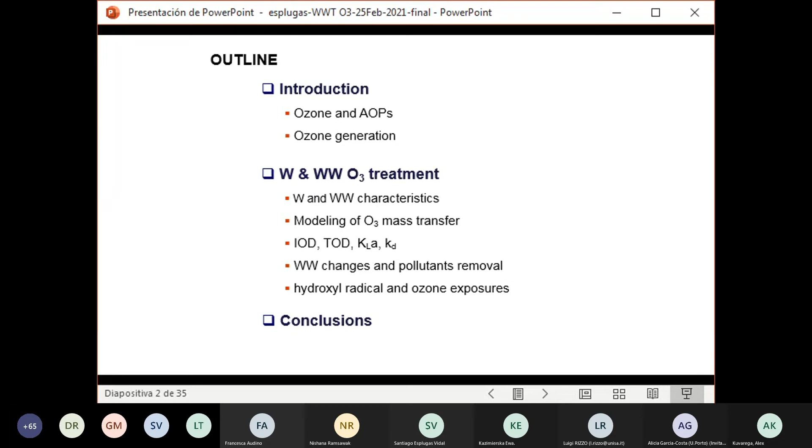Well, let's talk on ozone. Ozone, this is the chemistry. This is a nice molecule with 3 atoms of oxygen. And here is more or less the history of ozone. Really, ozone comes from the Greek "ozein", to smell. This is because if you are in a storm night and there are some sparks in the sky, you will smell something, and this is the typical smell of ozone formed by the sparks and the oxygen

present in the atmosphere. And as you can see, ozone was discovered near 200 years ago, and only in 1863 was it known that the molecule was the same as oxygen and is formed by three atoms of oxygen. Two important characteristics of ozone. One, I will focus more in the next slide on this: on one part we have the tropospheric ozone.

When you go to the media, you will see people talk about the good ozone and the bad ozone. The good ozone is the stratospheric, it is in the stratosphere, and acts as an ultraviolet filter of the radiation, and prevents UV radiation from arriving at the surface of the Earth, mainly in the southern hemisphere. That is the good ozone, the stratospheric.

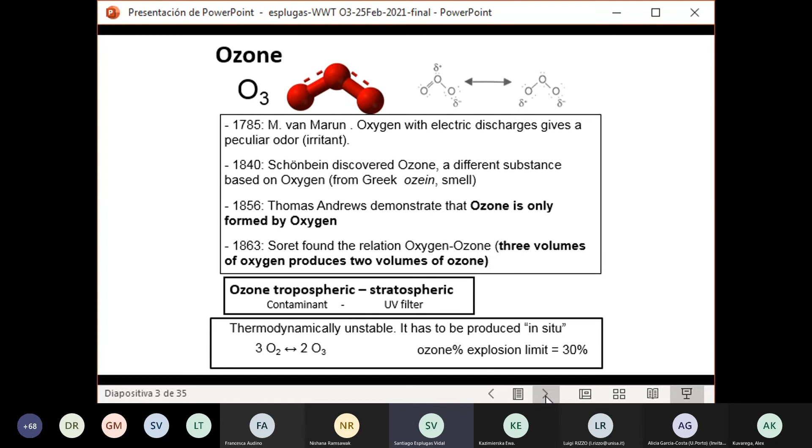That means it's not a problem. More of some ozone properties I indicate here. It's a blue gas, irritant, heavier than air. That means that it remains near the surface. It is very reactive and unstable. That's good, very reactive and unstable, because it reacts fast with the chemical compounds.

As I said before, it needs to be generated in situ. It's more soluble in water than oxygen. That is good in order to have the effect of an oxidant. It's a strong oxidant and used as a disinfectant. An advantage: because it is formed by atoms of oxygen, it does not introduce new ions in the medium, the water medium.

There is also one disadvantage: from a technological point of view, normally mass transfer controls the process. That means transferring the ozone from the gas phase to the liquid phase, where it reacts with the pollutants in the water, is mainly the control of the global process. And as I said before, it's an air and toxic pollutant.

And here you see some nice pictures I found on the internet about the difference between tropospheric ozone, stratospheric ozone, etc. And this is also important because of the toxicity of ozone to humans. That means it's not an easy gas to manage. If you work in the lab, you need very good ventilation, under an exhaust fan. If not, you get a cold very easily, or if you have problems of asthma, these kinds of problems will be increased.

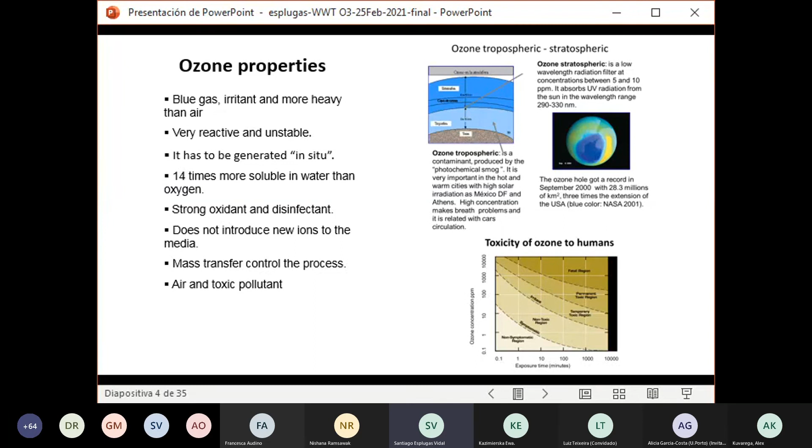Well, this slide shows the relation between ozone and the AOPs. Sometimes people indicate that ozone is an AOP, and sometimes others indicate no, ozone is different from AOPs. I suppose at the end of this webinar, you will know the reality. Ozone is an AOP and has special characteristics that are very valuable. In this slide, I indicate, well, not all, I suppose there are more AOPs, but you will see the first ones indicated involve ozone as AOPs.

Remember that AOPs were defined in 1987 by Glaze regarding the hydroxyl radical advantages in water to remove contamination under mild conditions, always focused on the hydroxyl radical. Later on, through investigation, other processes entered the AOPs, like Fenton, photo-Fenton, electrochemical processes, titanium dioxide photocatalysis, and people learned it's not only the hydroxyl radical; other radicals, hydroperoxyl, and also radicals that make the same function, like persulfate or peroxymonosulfate, entered this field.

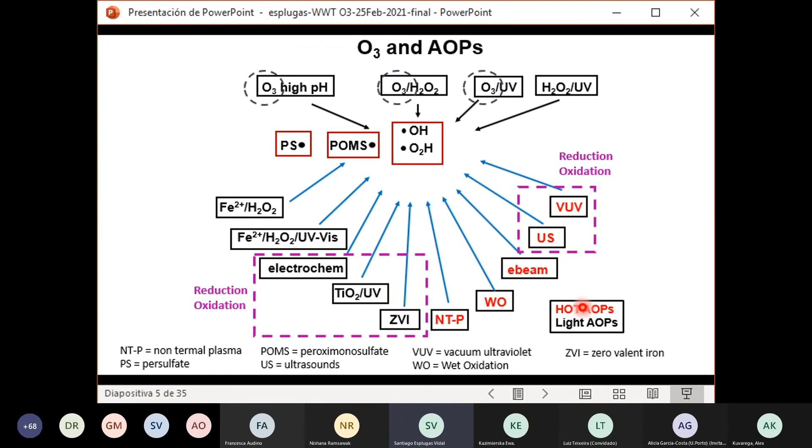That means that nowadays maybe we need to talk about hot AOPs, AOPs that are really not mild conditions, as opposed to room temperature, atmospheric pressure to produce hydroxyl radicals or similar radicals, like the AOPs initially used and defined.

Well, let's go to some chemical properties of ozone, and the most important is the reactivity. You will see in this graph we have the ozone. The ozone may react in two ways. One way: it oxidizes the compounds, and this is the direct attack of the ozone on the organic or inorganic molecule. This attack is on high electron density sites and is selective. Not all the compounds have the same mechanism.

And the second is through the production of hydroxyl radicals. The hydroxyl radical is very well known and oxidizes the compound. The hydroxyl radical is much more unselective, and really few compounds resist the action of the hydroxyl radical. That means the hydroxyl radical does not discriminate between one molecule or another.

And there are some general considerations taken into account: initiators of these hydroxyl radicals, hydroxyl ions, hydrogen peroxide, UV radiation; some promoters, ozone, hydrogen peroxide, organic matter; and another important thing, inhibitors. There are some scavengers, and one scavenger is hydrogen peroxide. We will talk later about this because there is an important AOP process, peroxone, ozone with hydrogen peroxide, that is mainly used in plants and has some controversy.

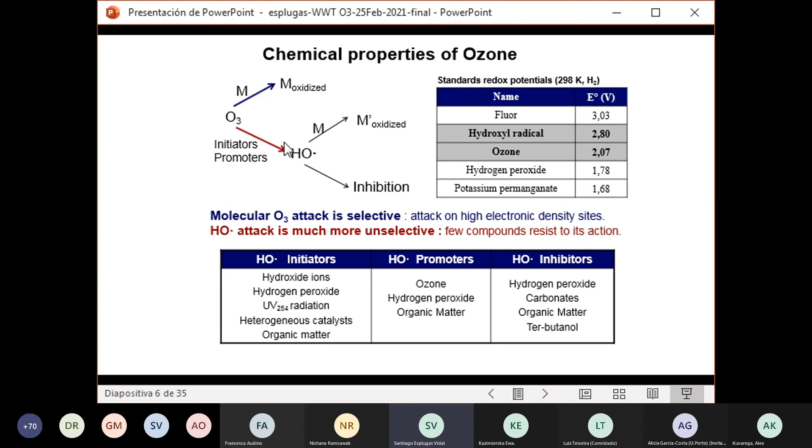Well, in the previous slide, maybe I went too fast. One important advantage of ozone is that it's possible to modulate its effect one way or the other, doing the oxidation selectively or unselectively. One possibility is to try to make it unselective, that means destroy all the pollutants independent of their type. In this case, there are some interesting ozone-based AOPs that move towards high production of hydroxyl radicals.

Some of them you may consider at lab scale. If you want to move to a pilot plant or demonstration scale, it is problematic, mainly because of what I have written in red. That means changing the pH for large volumes or large flows is not easy. It's complicated. The same happens with the use of UVC.

For this reaction you need UVC, because the wavelength for the reaction is below 310 nanometers, and it's complicated. You also need quartz material that is fragile, lamps that are not reusable, etc.

Ozone with hydrogen peroxide, which is maybe the most used after direct ozone treatment, has this problem: the cost of storing and manipulating hydrogen peroxide. It's not very easy to manipulate hydrogen peroxide at high levels.

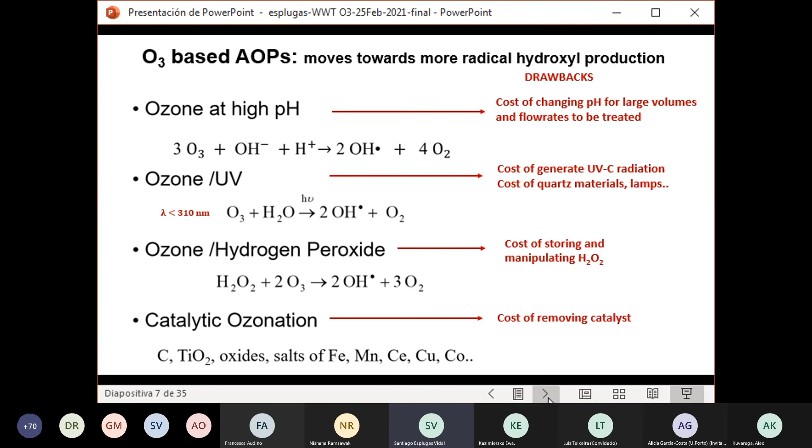And finally, catalytic ozonation. It has a small or moderate problem in removing the catalyst. You put in a catalyst, normally a solid material, with the water matrix, and later on you need to remove it. That means it doesn't look very convenient.

Well, hydrogen peroxide with ozone is the peroxone. This is the chemical reaction of the peroxone. This is not the reality because it's the stoichiometric reaction. You need to add one hydrogen peroxide molecule to two molecules of ozone, and this reaction gives two hydroxyl radicals. The ratio of hydrogen peroxide to ozone is important. You see here it's 1 to 2, but really the best results were more or less 1 to 1.

Why? Because hydrogen peroxide is also a scavenger of the hydroxyl radicals that you produce. That means that in some cases, instead of continuously dosing ozone to a batch reactor with wastewater, micropollutants, and hydrogen peroxide inside, it's much better to dose both at the same time. Dose ozone, dose hydrogen peroxide, and the results in continuous mode are good.

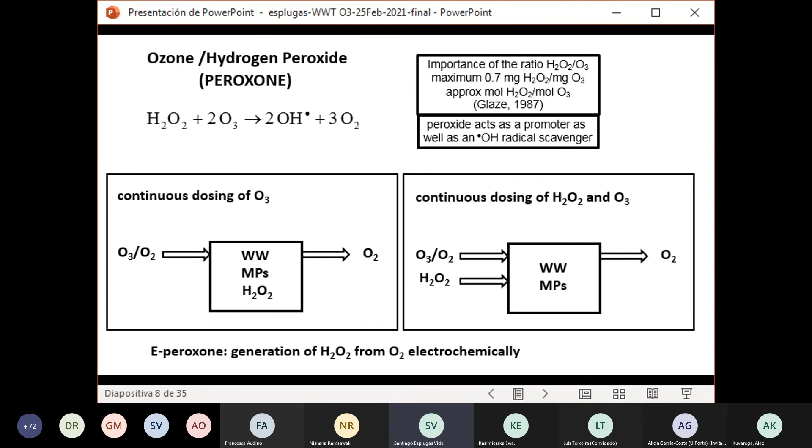And one important advancement in this area is the electroperoxone. Having hydrogen peroxide in storage needs important investments because it's not that easy to store as a liquid. It may explode. So how is it possible to generate it electrochemically? There are some nice papers lately that work on this. And this all goes in the direction I said before: transfer all the oxidation power into hydroxyl radicals that are not discriminative with the compounds to be removed.

Well, another important point is ozone generation. I said previously that I would talk just one slide about this. For on-site generation it's not problematic, because the technology is very easy. You only need an electric discharge, and in this discharge you produce some radiation and also ozone. It's not very complicated. Unless you want to use UV radiation, but that gives a very low ozone concentration, and normally it's only in labs, not in pilot plants or demonstration scales.

Here are some advantages of ozone: not necessary to transport, not necessary to store, the air is no cost, easy to produce, the technology is very simple. But there are some drawbacks. You need to remove the humidity, and the excess ozone has to be removed, because if not, you contaminate the atmosphere. And maybe the big drawback is that only 5% of the electric energy goes to the chemical bonds. That means the electric yield is very low. But there are some people, mainly in Japan, working on a better electric-to-chemical yield.

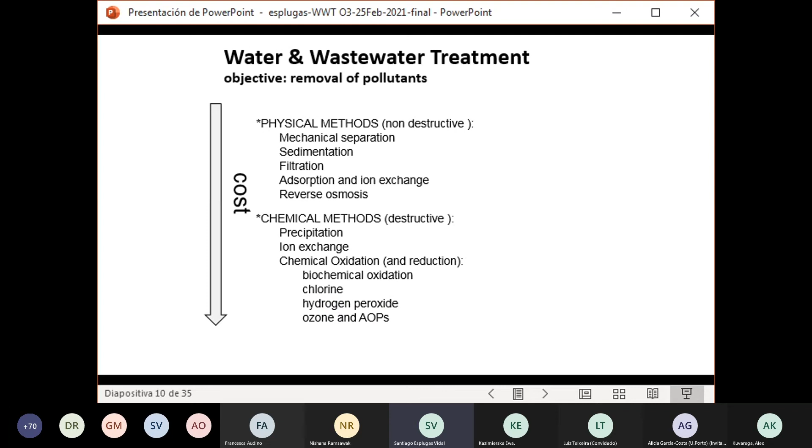Well, let's move to wastewater treatment, in general, not necessarily by ozone. If you want to treat water and wastewater, normally the objective is removing pollutants. There is a logic that depends on cost: first try physical methods that are not destructive, such as mechanical, sedimentation, filtration, adsorption, reverse osmosis, and later on try destructive methods that are more expensive. Chemical oxidation and reduction are expensive. Biochemical oxidation is cheaper. That's why you use them at the end of the treatment chain.

Well, with reference to water treatment, ozone is widely implemented nowadays in tap water treatment plants. It's more complex, but this is the simplest way of using ozone.

You have the raw water. You want drinking water. That means you have here the solid removal, coagulation, sedimentation, later generation to put ozone, later activated carbon. This part corresponds to organic matter removal, and finally some filtration, and sometimes at the end some chlorination, and you have advanced purified water.

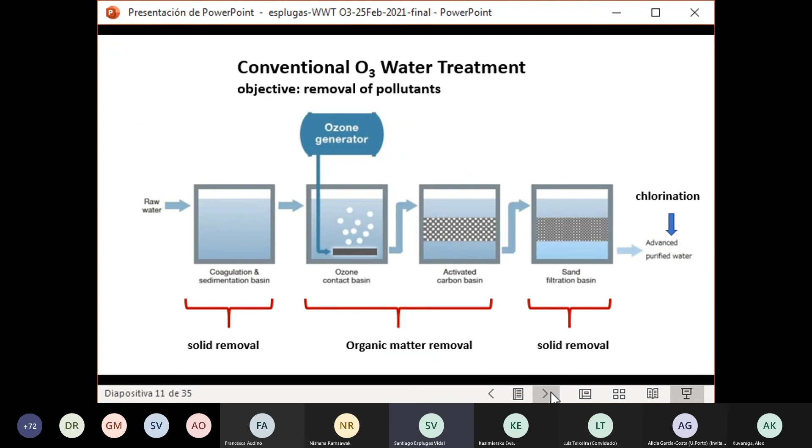This is very simple, but in reality they are more complex than this; it's a very simple one that I found on the internet. In the case of wastewater treatment, it's the same. The objective is the same. The objective is the removal of pollutants. And normally the way is similar to the previous one. You have primary treatment to remove solids normally.

Secondary, normally biological treatment. Here I put the typical activated sludge. Activated sludge nowadays is changed by membrane bioreactors or moving bed bioreactors that are all different. And finally, a tertiary treatment that is optional, sometimes chlorination.

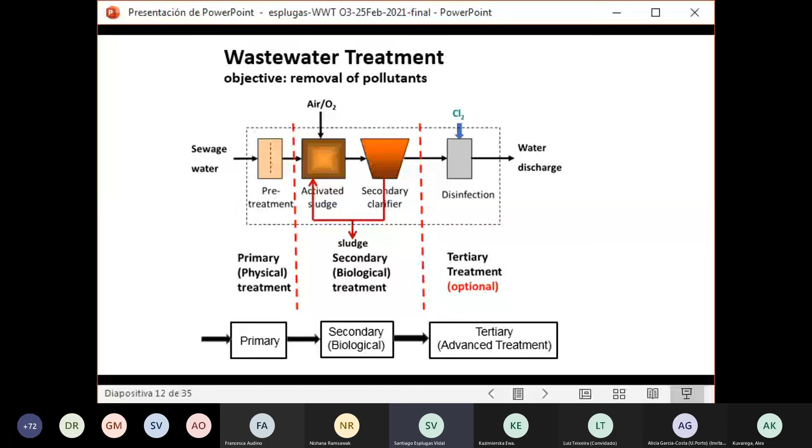This is easy, and what's important is the removal is the same, and the difference is the matrix. The water matrix is more complex in the sewage than the raw water you use in order to have drinking water or tap water in a water plant.

In order to remove the pollutants, oxidation, AOPs are not the only technology. There are other technologies that may help this part. That means adsorption processes, membrane processes that are used also in water plants, in wastewater plants, and also biological reactors. And here in this slide, I indicate more or less some drawbacks that the AOPs and also biological reactors have. That means you need to evaluate hazardous products that may be formed during these chemical or biochemical reactions.

And another drawback, but it corresponds to the adsorption process and membrane process, is that really they don't solve completely the problem. You have some contamination in the liquid, and this is a transfer of the contamination from the liquid to a solid or to a concentrate. And the same, you need to treat the concentrate of water. It means it does not solve specifically the problem of the removal of pollutants in water or in wastewater.

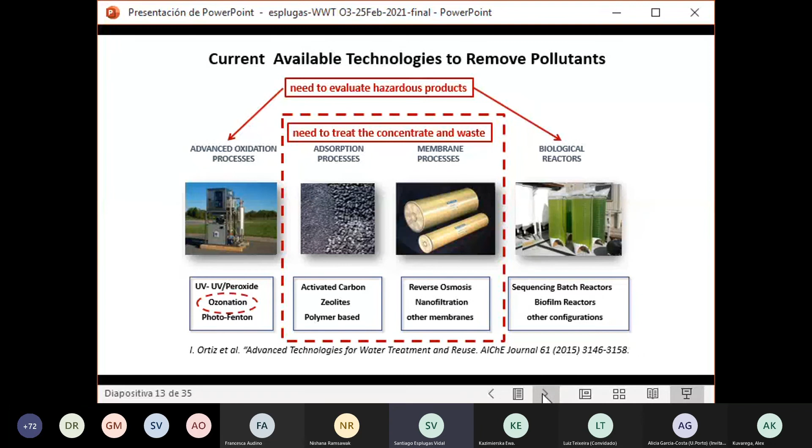Well, parameters that you need to follow if you are working or researching in water and wastewater treatment by ozonation or with activated carbon or similar. It's independent. There are many. I indicate some of them that are interesting to follow that affect the chemical oxidation, such as total organic carbon, dissolved organic carbon, alkalinity. This affects a lot the ozonation.

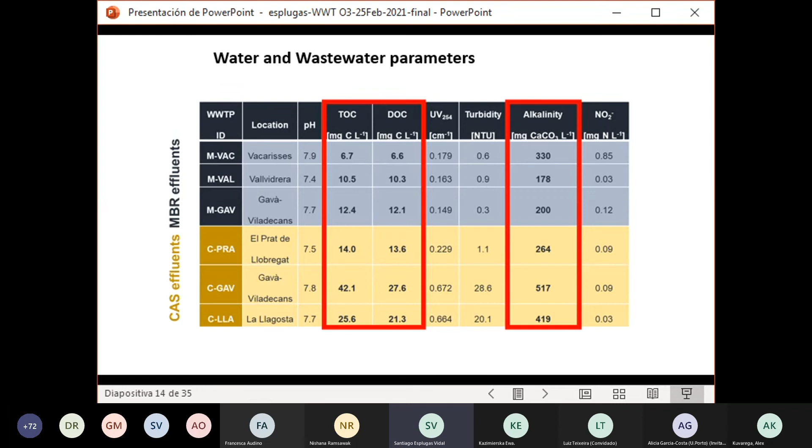Also the turbidity affects, also the nitrite content, and also the UV 254 nanometers, the absorbance measured at 254 nanometers. That corresponds to the aromaticity, how many aromatic compounds I may have in the water matrix. And here, yes, I put different wastewater treatment plants because the problematic of the pollutants in wastewater is more complex than in water. Normally, when they want to produce drinking water, they use water that has enough quality to be treated. In wastewater, the quality is so bad.

Here is a bigger list of the parameters to follow, to control, in order to have an idea of what happens during treatment of water or wastewater. I say chemical oxygen demand; I haven't included it in the previous slide. I haven't included suspended solids. I include only turbidity. I haven't included the ammonia content. It's nice to see because ammonia may be oxidized by ozone and other oxidants. And also molecular analysis.

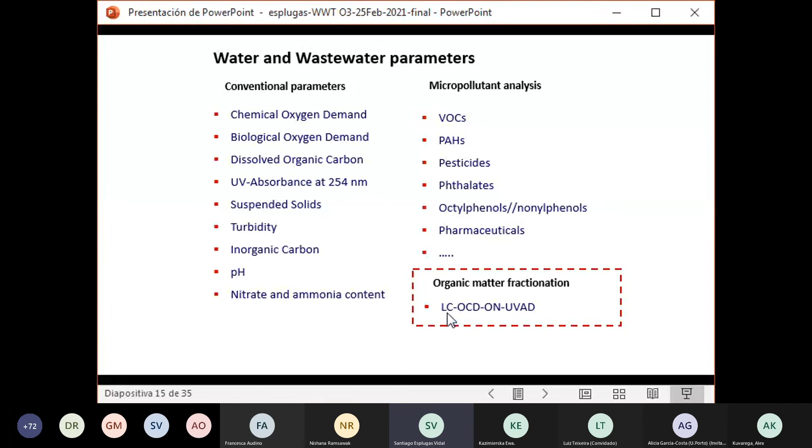Molecular analysis is very complex, and sometimes people make some groups and talk about VOCs, PAHs, pesticides, phthalates, phenols, pharmaceuticals, etc. And here there is an important parameter that is not very much used, that is organic matter fractionation. In this case, it's liquid chromatography with organic carbon detection. This is not very new. I think it started 10 or 15 years ago.

And this is important because there are many people working in this field and relating this with the problems that people have in membrane separations with fouling. And if you make an oxidation treatment of the water, you oxidize the organic matter that is in the matrix, and maybe you change the conditions, and maybe you have problems in the membrane separation you have at the end of the wastewater treatment train.

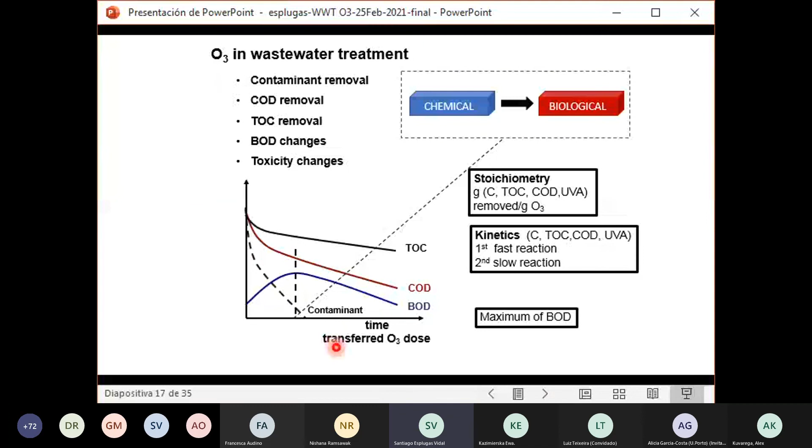Another important point is toxicity. I haven't indicated it in this figure because toxicity is complicated. Sometimes it increases, sometimes it decreases. Managing toxicity, it's very complicated to explain its behavior. And the kinetics, the removal of carbon, TOC, the compound, COD, UVA: normally at first it's a fast reaction, then a second period of slow reaction, according to time or transferred ozone dose, as I will say later.

Well, let's talk about some modeling. I know people don't like equations much in a presentation, just to indicate that it's very important to know the mass transfer of ozone in your system. Ozone mass transfer depends on physical properties, concentration at the interface, turbulence, the gas hold-up, and this is a two-film model. I suppose some of you are from chemical engineering and know the two-film models.

That means the ozone gas needs to move to the interface, then needs to move to the bulk of the liquid, of the water, and reacts there. This is a kinetic step that follows an equation like this. Normally, because of the low concentration of ozone in the gas phase, the control is in the liquid, the diffusion in the small layer, and this is a typical problem of absorption with chemical reaction. There is a lot of information in the scientific literature and general books on this, and a number appears that many people know. It's just to know that if you have problems in ozone mass transfer, you need to move in this field.

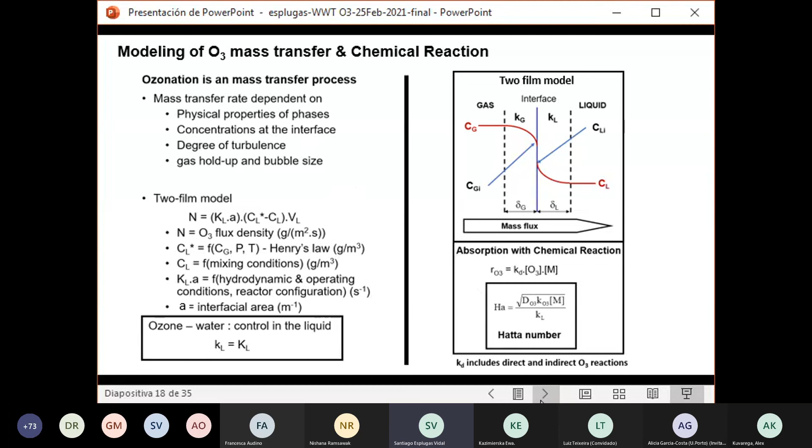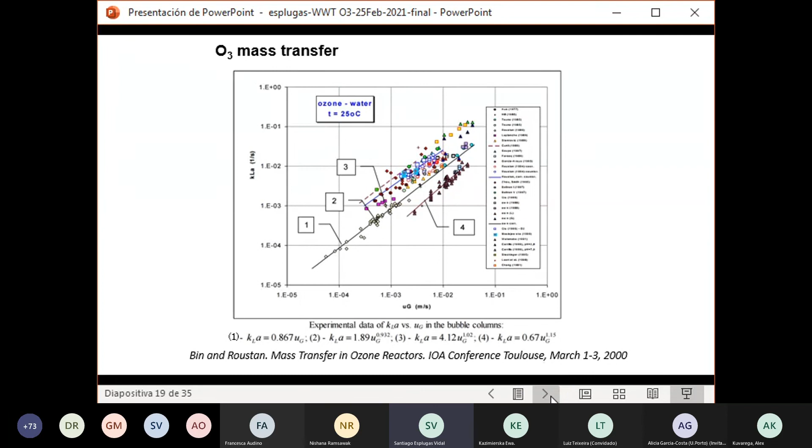There is information about some of these parameters. For example, in ozone mass transfer a lot of information is available, mainly using pure water, not wastewater, and values of KLa, the mass transfer coefficient on the liquid side. I recommend this paper, but if you search the internet or the scientific literature, you will find many good correlations. That means you may simulate this behavior.

And the same happens with the reaction of the ozone. I indicated previously that ozone may react by itself or may react producing hydroxyl radicals. So the chemical reaction of contaminant removal is two reactions in parallel: one is the ozone direct attack, the second is hydroxyl attack. In the scientific literature you will find a lot of information about kinetic constants for these reactions. And it's interesting to note that in recent publications, maybe some of you know about this, there is the quantitative structure-activity relationship.

There are some estimations. I think QSAR was first used in pharmacy to know if a molecule may be reactive to treat a disease or not. And there is a protocol for estimation or prediction of parameters. It's possible to predict, because not all compounds have been studied and have information in the scientific literature. You may move to this paper, it's in press, accepted, and you will know more about this methodology that works fine for compounds not yet studied.

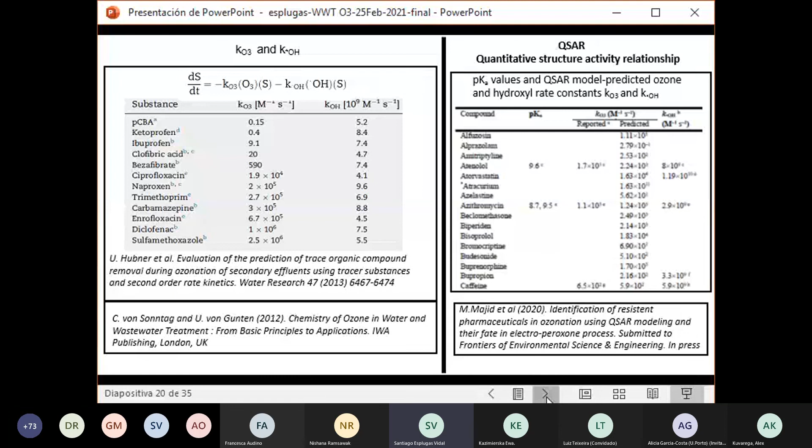Well, if you work at pilot plant, or with wastewater, a complex matrix, you need to take care about the immediate ozone demand and the transferred ozone dose. Instead of time, people prefer to use the transferred ozone dose. The IOD is the minimum ozone dose, milligrams per liter, to be transferred to have dissolved ozone in water in a continuous flow.

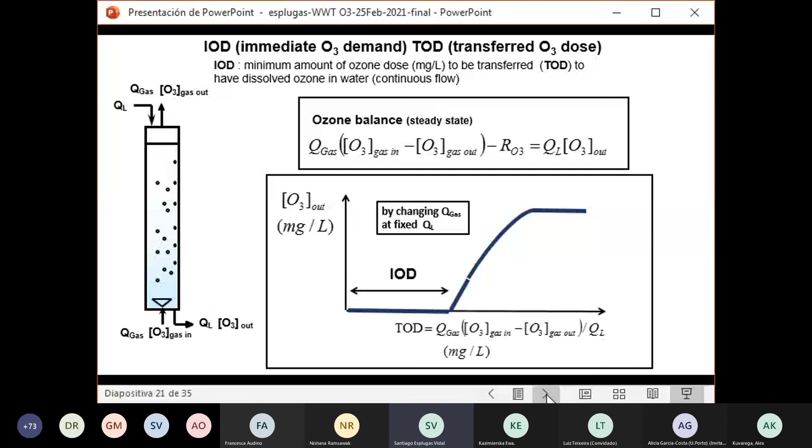You have a continuous flow. You simply maintain the liquid flow rate constant, you modify the gas flow rate, and at the point when you detect ozone in the aqueous phase, this is the immediate ozone demand. Logically, with pure water this value will be near zero, but in wastewater it may be 2, 3, 4, 5, 10, up to 20 milligrams per liter. That's the zone where ozone is consumed by the highly reactive compounds in the media. It's important to take this into account if you work with very complex water matrices.

Also, I will move quite fast in this. This is semi-continuous ozonation. It's possible to evaluate, to estimate this IOD, the mass transfer constant of ozone, the constant of removal of ozone, with this simple mathematical modeling. You may find this in this paper, and this is more or less the shape of the curve we present in this modeling.

Here is the IOD and the start of the ozone to be detected in the liquid phase. And this is the ozone gas inlet to the system, and this is the ozone gas outlet of the system. You inject the ozone this way and it leaves this way. And here you have the water. Ozone concentration in the water is 0 at the start, and it takes some milligrams of ozone in order to appear in the water. This is another interesting parameter to use when working with wastewater effluents.

Here are experimental results in my lab of estimation of IOD, these parameters in municipal wastewater effluents from different effluents. It's interesting, one of the effluents was the sludge. The sludge is 75% water by weight, and you will see the IOD is quite large. And if you look at primary effluent, that is effluent that is going to enter a secondary treatment, that means biological treatment to remove organic matter, it has an important value.

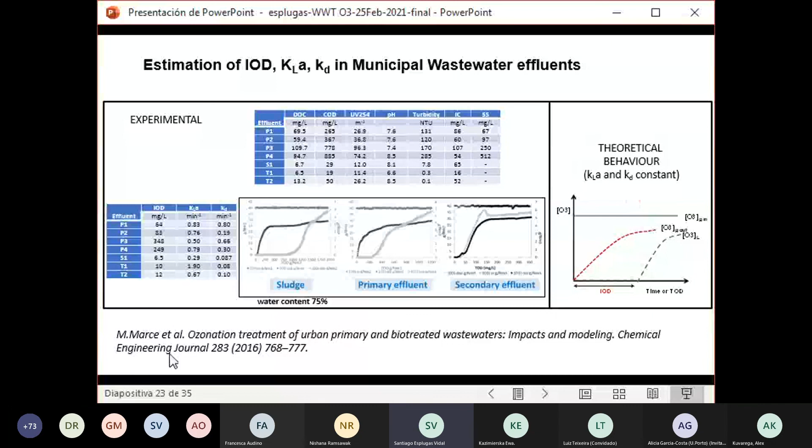And if you are in a secondary effluent that leaves the secondary biological treatment or membrane bioreactor, you will see that this value is really very low. And you will see that it is more or less not the same behavior that this model predicts, but it's not bad. More information you may find in this journal.

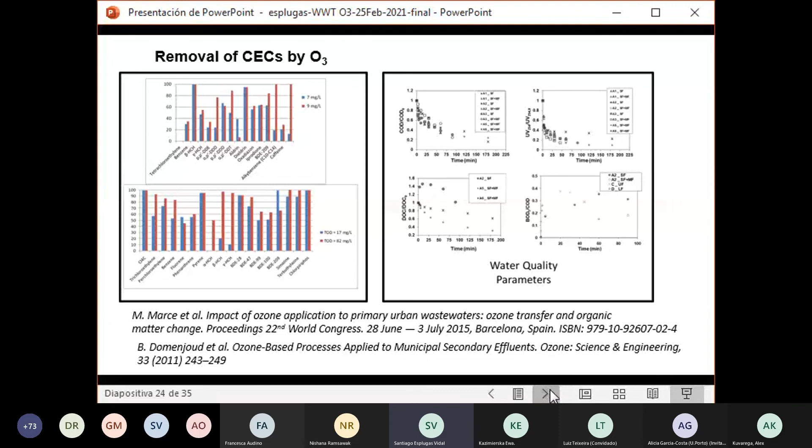The removal of contaminants of emerging concern by ozone depends on the dose. You will see in this slide, you increase the dose, you increase the removal. And it is also important to know that the water quality parameters of COD, UV, DOC, and BOD change. Sometimes it's important to take this into account. That means if you work in wastewater media, it's very important to follow this because these are parameters easy to follow. And the same happened with the LC-OCD.

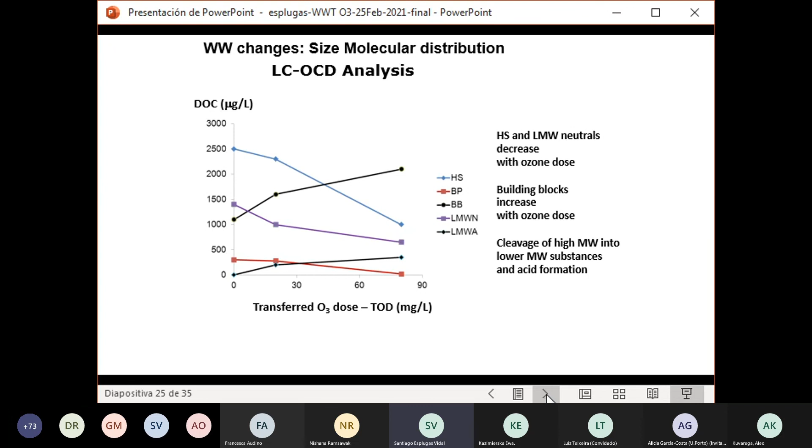Another important point is the importance of the total transferred ozone dose in ozonation. You will see 10 milligrams per liter, 9 milligrams per liter is enough to remove all the compounds, but you have to take into account that it depends on the values of the chemical kinetics of ozonation and the chemical kinetics of hydroxyl radical attack.

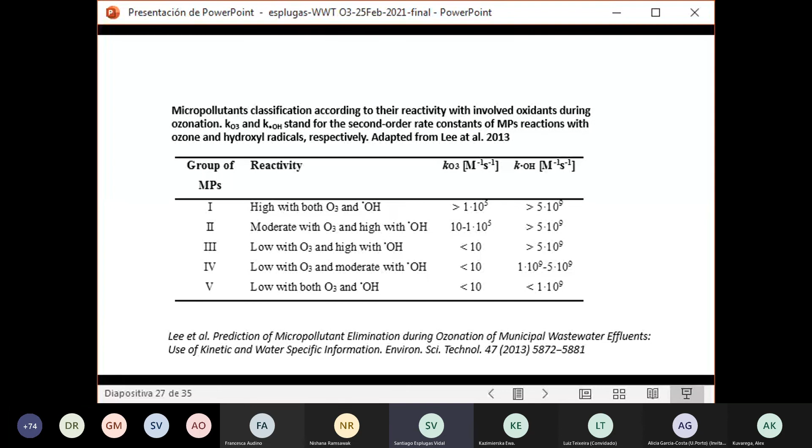According to this, this is a table adapted from this paper. It's not the same. It's something I changed just to classify the pollutants according to the kinetic constant of ozonation and the kinetic constants of hydroxyl radical attack, and it's possible to classify them in 5 different groups that may give different behavior when you treat these compounds with ozone.

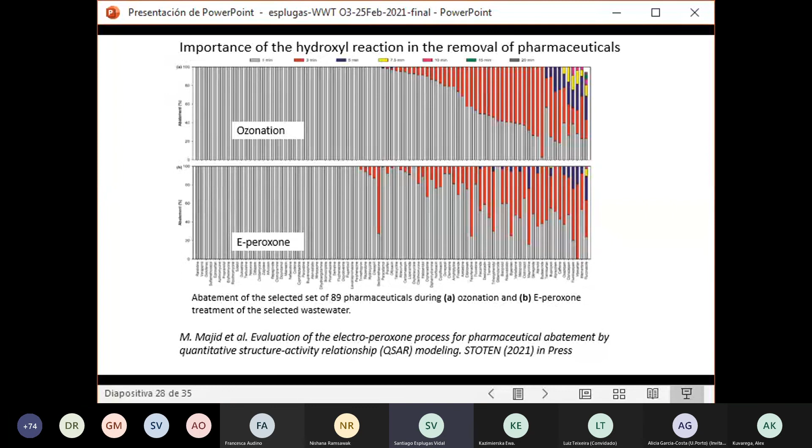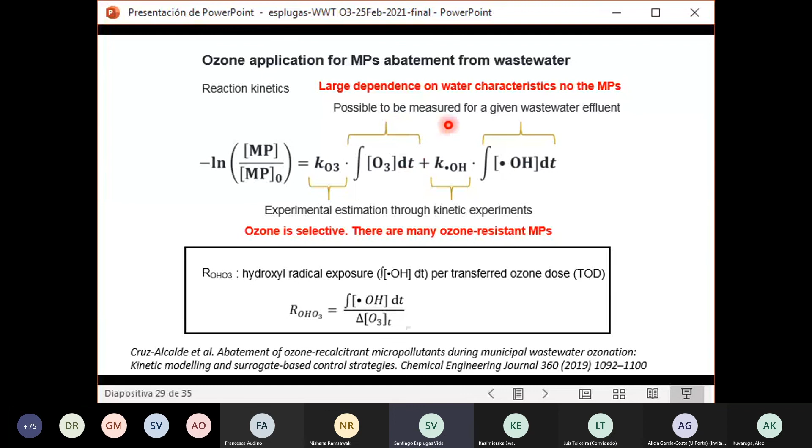That means you may use the ozone rate constants and the hydroxyl radical rate constants found in the literature, and you may find these values by doing some experimentation at lab scale. And this is the case. I use acetamiprid, that is a micropollutant refractory to direct ozone treatment, in different wastewater matrices, all corresponding to different effluents. And also we see this hydroxyl radical exposure.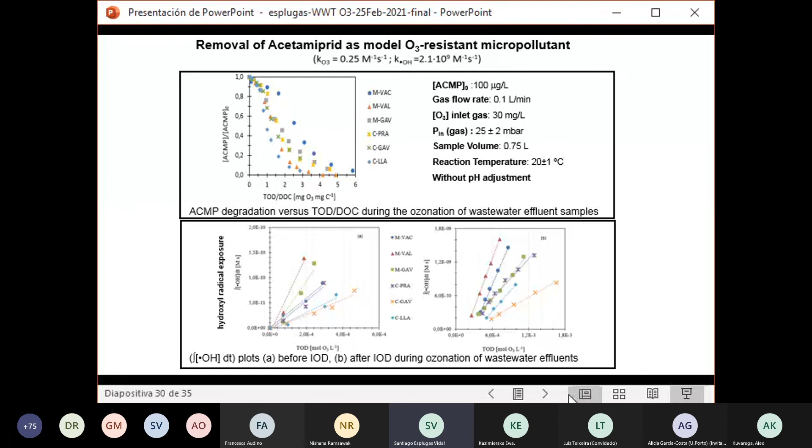And in this case, there are two different zones: one before the IOD and one after the IOD is completed. That means the behavior is different. It's logical because before the IOD the reaction is quite fast, and after the IOD the reactions are slower. And with these values, is it possible to simulate what happened with other compounds like ibuprofen?

2 minutes, Prof. Santi, I'll give you 2 minutes to finalize. Our time is running out. Okay, 2 minutes, I will finish.

This is ibuprofen, you will see that it's good.

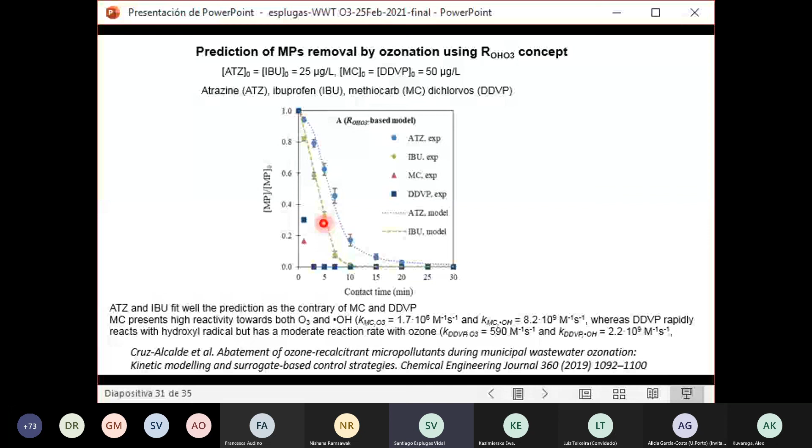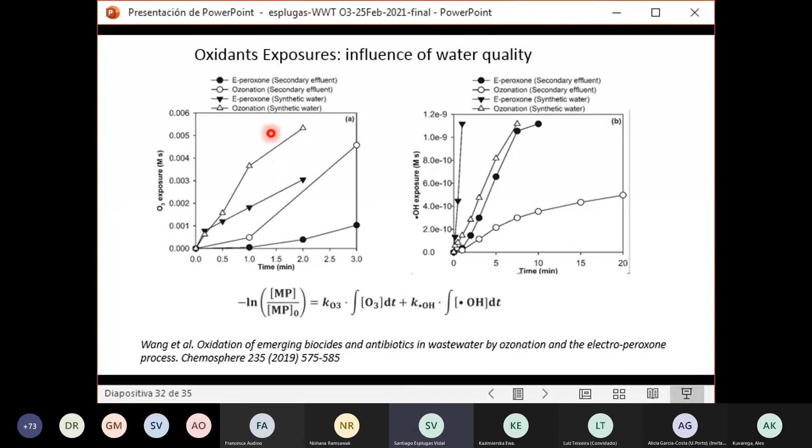The simulation. Here, the same situation of exposure influence of the water quality. In this case, it is water and wastewater effluent. Normally, when one is working with wastewater effluent, exposure is smaller than if you work in water. And I got finally to conclusions. I will be too fast.

Ozonation is able to reduce all these important parameters, such as COD, DOC, UVA, turbidity. It increases biodegradability, so it's a very good effluent. It's important to see the change in the molecular size distribution of the organic matter.

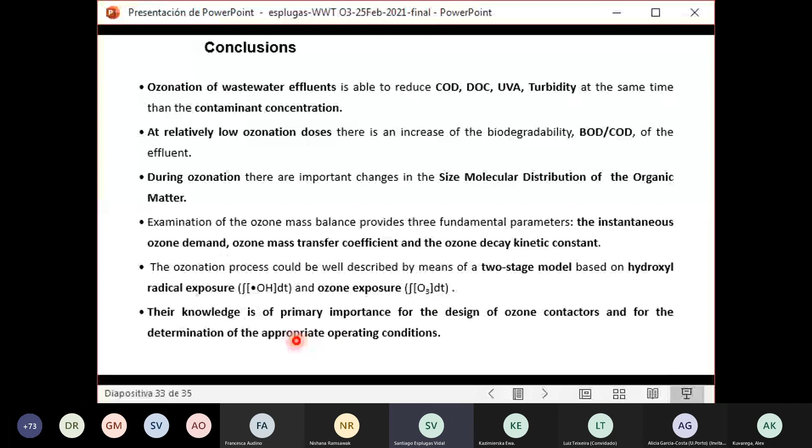The ozonation process could be described by means of a two-stage model based on hydroxyl radical exposure and ozone exposure. This is almost new nowadays. And finally, this knowledge is very important if you want to design ozone contactors and determine appropriate operating conditions.